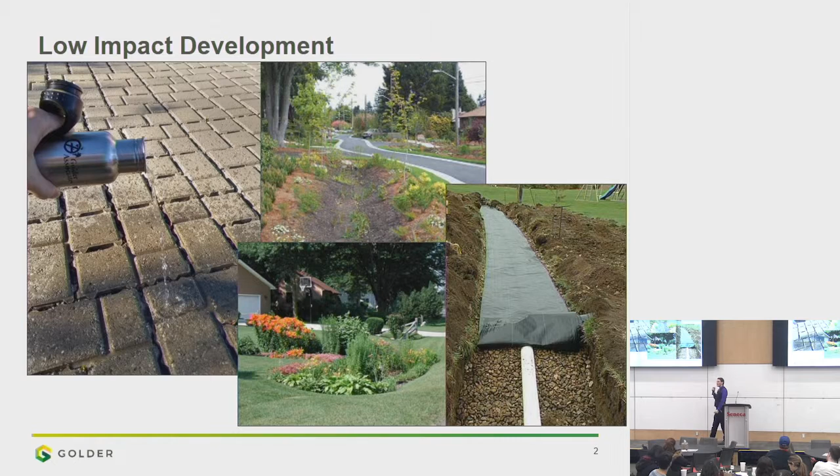So despite the fact that there's been a rising tide of adoption in the United States, which is way ahead of us in terms of this, and mountains of data about how this stuff is working out, we haven't really seen that adoption in Ontario, again, until quite recently. And the problem is, unfortunately, engineers. And I do count myself in this group. I am very much part of the problem. Because engineers are creatures of habit.

Since we deal with really complex systems that are the intersection of things like climate, rainfall, runoff, and downstream receivers, we tend not to trust those physical formulas. We tend to go for curves that are fit basically to experimental data, stuff that's been measured. Best example of this, this guy here down in the gray, is called Manning's formula. This is the biggest formula in stormwater management. It's what holds it all together.

This formula is the governing formula for everything that I do. It's actually not a physical formula. It was developed as a best fit curve by an accountant over 100 years ago during the Irish potato famine. But it works, and that's why we still use it. And that's the kind of attitude engineers have.

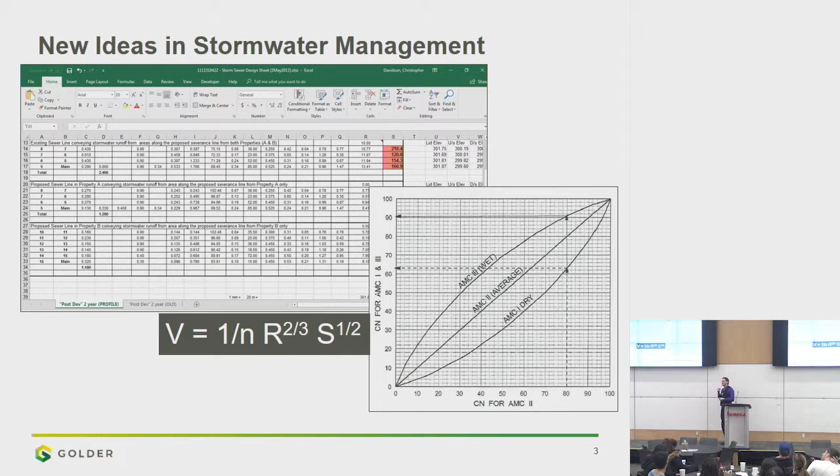We all have our own Excel spreadsheets for calculating things like pond depth or pond size or stormwater capacity. And it's ridiculous, but I mean, that's what we have. It works, so we hang on to it, even when better modeling comes along. So changing that kind of attitude, introducing low impact development to that kind of people, it takes a lot of salesmanship. And to their credit, regulators like conservation authorities and cities have done a lot of work getting the word out there about the benefits of low impact development for developers and for cities.

So people like David have been talking at conferences for a long time. People like Jen Hill, who you'll hear from later on, have done a lot of work with the Sustainable Technologies Evaluation Program and the Toronto TRCA. There's also been a lot of regulation changes that have encouraged low impact development.

Despite these really great endeavors, there's still a lot of headwind to actually bringing up LID and making it something you see a lot in Ontario. Actually, just a quick question. So you guys haven't seen LID as far as design before. Has anybody actually ever seen elements of low impact development in Toronto? Like permeable pavement, we've got a couple there, okay. So things like a bioretention system, things like a rain garden, they're not that common.

So the problem, again, as I said, is engineers. And engineers are busy people. You can only really get in front of them so often in terms of doing workshops, doing conferences. So how do you kind of convince them of the benefits of low impact development? A couple of years ago, some conservation authorities got together and came up with an innovative solution. They were going to make a software tool.

So a software tool as a way of communicating a new idea, especially a new concept or breaking a habit, has some great things going for it. For one, a software tool gives you a lot more face time with your audience. So when you're talking at a conference or a workshop, that's a single structured event. You give them a software tool, they can bring that home, they can use it again and again, and they can keep trying it out on their own.

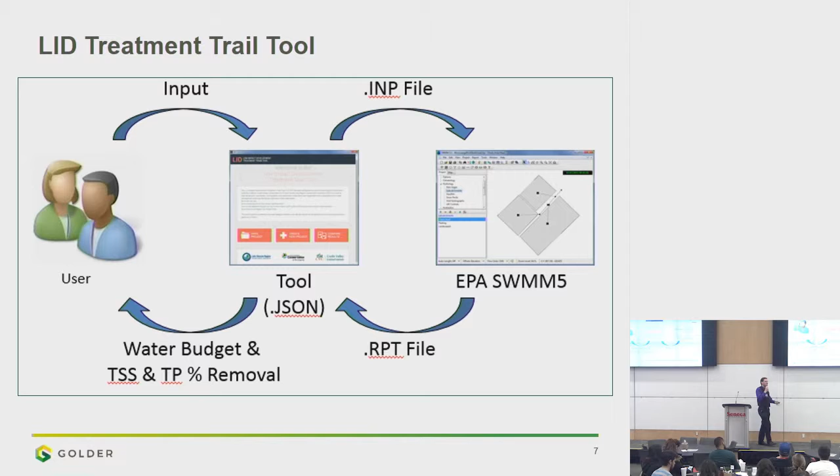So the way our tool works, the user designs their thing in the interface. The tool then creates the input file for SWMM. SWMM 5 runs in the background, produces a report file. Our tool is going to mine that report file to get some of the information out of it, and answer those key questions that the conservation authorities are looking for. So again, things like water budget and removal of certain parameters.

And the idea is all this happens in the conceptual design phase. So when you think of development, you have an early development, just looking at a blank site. You have a conceptual design phase when you're working out where the houses are going to go, where the commercial areas are going to go. And then later on, once you've actually gotten to drawing the lots, drawing the sewers, drawing the roads, then you do your detailed design and you're done. So this is at that early stage.

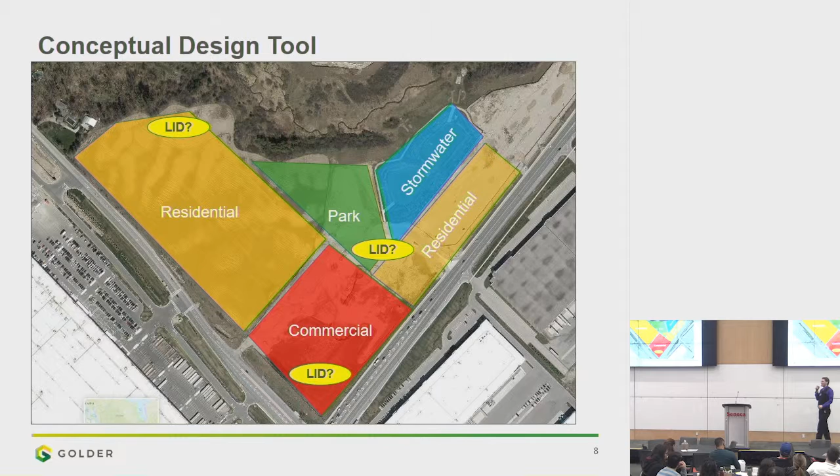And the idea is that right when the developer is sitting down with the regulators or maybe with the public at a design charrette, they're getting to figure out where they're going to put some LIDs and how this is going to work and what kind of targets they're looking for. So again, this model is being designed as a way for plenty of people to use at that early design stage and open for everybody to use.

So I'm going to give you a really quick run through the user experience from the model. Again, this is a model for everyone. We're not making this specifically for engineers, but people who want to experiment with different LIDs and get a good idea of what's happening with stormwater management.

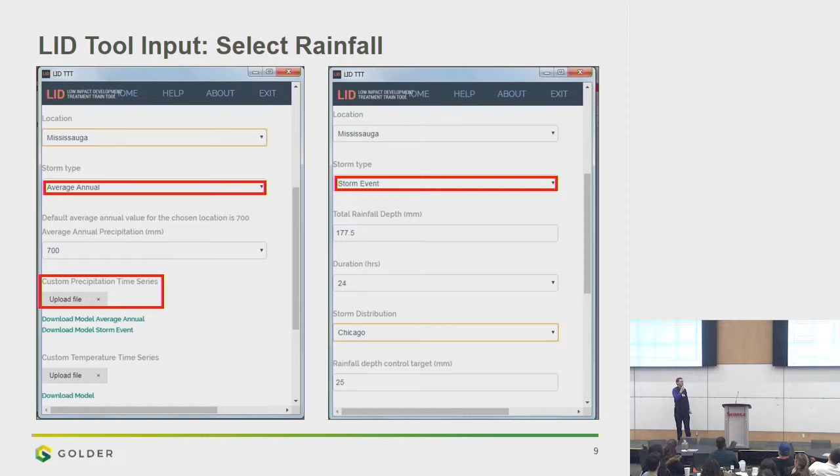So when you first select your site, you just select a location and whether or not you want to run an annual average storm event or a specific one storm event. You select your location, and based on that, the tool is going to recommend some average annual precipitation, or you can go ahead and enter your own numbers. Conversely, if you want to do a storm event, so if you're looking for the 100-year storm or a 25-millimeter storm, you go ahead and enter that. You enter in the distributions for your rainfall and run the tool.

When you actually get to running the tool, you get to draw your catchments and draw your LIDs within the tool. The models are done in a GIS environment, so you get all the areas measured for you. The tool is going to pre-enter some of that data for you based on the area you've drawn. You can draw on a base map, you can draw on an aerial photo, you can draw on GIS and CAD files you've imported from some other source.

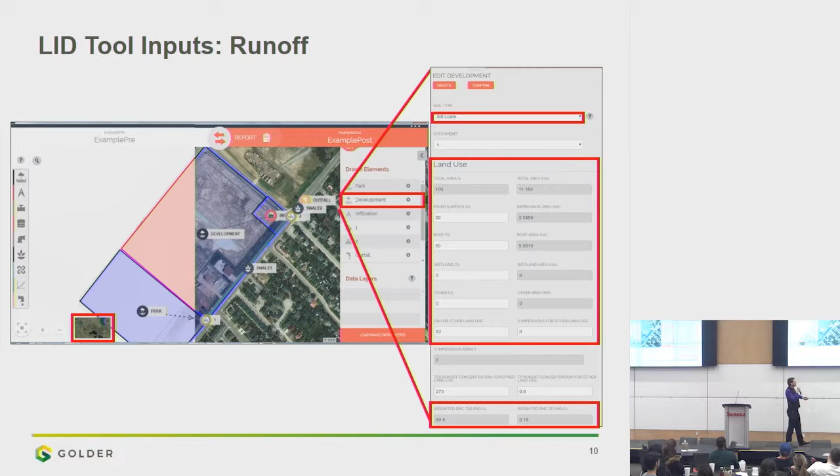And all the user has to do is enter in basically stormwater or soil information and some basic information about land use. And the tool is going to pre-fill some of those values in there. So again, all the default values are in the tool, but you can go ahead and override those. So things like curve number for runoff, things like runoff concentrations, you can go ahead and override those if you have a reason to.

As far as LIDs, we've got a whole bunch of LIDs in the tool, so you guys hopefully will be seeing more of these in your next couple of years of study. Different LIDs include things like surface LIDs, so rain gardens, where basically you just have a low point in the ground that's designed to infiltrate water, or something like a permeable pavement. Infiltration LIDs, so things like infiltration galleries, things like bioretention facilities, you can add those in there.

Things like oil grit separators, so that's when you have a manhole, you have a lot of flow coming in, the manhole is going to remove some of that sediment for you because of just the way the manhole is set up, or even traditional stormwater management facilities at the end of pipe.

So all those are in there. We've got default removal percentages for those to provide what kind of environmental benefit it's going to do. But more importantly, you can override those because we understand that one size does not fit all when it comes to LIDs. It really depends on the design of them. And you guys will be doing the design of some of these LIDs. Fortunately, the tool has some helpful hints in there to help you design those LIDs.

So for instance, if you've run too much area to your LID, it's going to flag that for you. If it's going to take a long time for your LID to drain down. So for instance, if you build a big storage system in the ground and the soil is really tight, it's going to basically take a long time to drain out, and the tool is going to flag that for you. So once you've done all that design, you've got your site laid out, you go ahead, you run the model, it does the SWMM 5 stuff, looks at the post-processing, and gets those results.

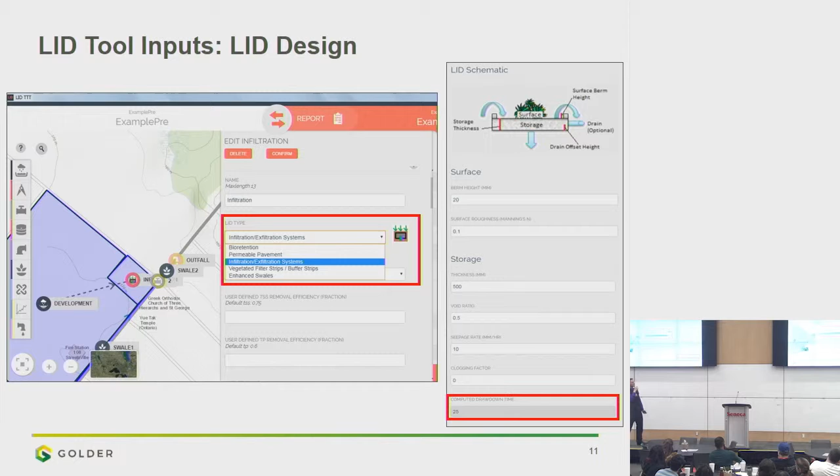So this is the first result, and this is, again, if you're running a storm event, the tool is going to give you an idea of volume control. And runoff volume control is wording that was coming from the Ministry of the Environment, now the Ministry of Environment, Conservation and Parks, thank you, yes. And we're still looking for that manual. It'll maybe come out someday. But we're looking basically at site control.

So this is my question for David. When you think of storms, in Ontario, we're asking you to basically control, it doesn't sound like much. It's like 2.5 centimeters is the design storm, 25 millimeters. Turns out to be a lot of water once you actually get to a fairly impervious site downtown. And we're asking you to control that on site usually. And this tool is supposed to help you do that. It's supposed to help you control the site, control that runoff, and treat some of it. So it's giving you the breakdown of what you're going to have to treat versus what you're going to have to store and comparing to those targets.

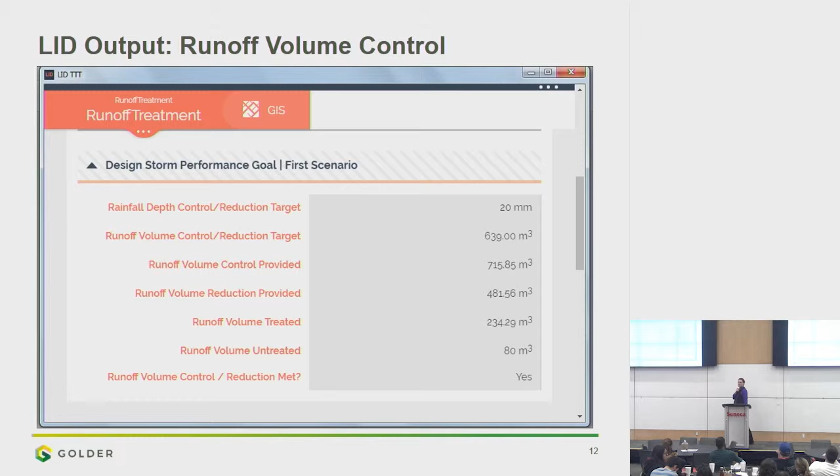Tool also gives you, in terms of results, water balances. So here I've actually run 2 scenarios. I've got an existing scenario and a proposed scenario. And almost every case I've worked on for the past 10 years for development, the Conservation Authority or the city has asked us to look at the water budget and match pre-existing infiltration to post-development infiltration. And you got to think that's pretty tough if you're paving over half your site. How are you going to get water back into the ground?

But the thing is, there are a lot of users of water out there. We don't think about it much in Toronto, but there's lots of people who have wells. There's lots of people who need groundwater resources, and there's lots of natural environments that do rely on that groundwater discharge. So keeping that up is critically important. In this case, you can see we've built a site where we've increased the imperviousness. There's a lot less evaporation. But the site infiltration has gone up because we've added some LID resources to get more water back into the ground to satisfy that requirement.

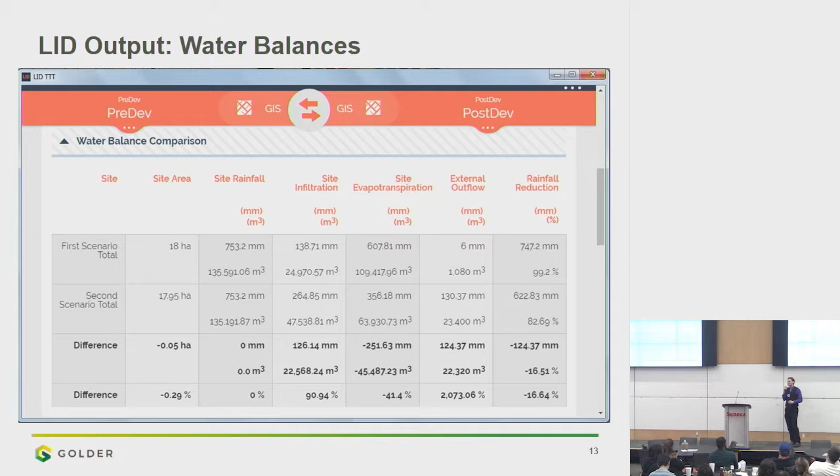And lastly, the tool is going to give you some loading input. So this is actually a specific request from the Lake Simcoe Region Conservation Authority. Anybody know where Lake Simcoe is? Show of hands. Okay, this is the best result I've got so far today with the hands up thing.

So it's north of Toronto, and it's got a lot of land use around it as far as cities, got a lot of farms around it. So they have a problem with phosphorus in Lake Simcoe. Phosphorus is pretty high. So recently, Lake Simcoe Region put in something called the phosphorus offsetting program. So developers are now charged an amount at development based on how much phosphorus is discharged.

And you see this one here, if you look at the left column here, 11.75 kilograms. Doesn't look like a lot. That's an annual loading for phosphorus. That 11.75 kilograms might cost the developer hundreds of thousands of dollars in development charges because they are really interested in how much phosphorus is going into that system, and the Conservation Authority is very strict about that.

The way to bring that down, as we've done in this case here, is to start looking at low impact development, start looking at ways to treat that phosphorus to reduce the eutrophication of the Lake Simcoe region. And it's not a Lake Simcoe problem only. There are other places that are having the same phosphorus issues. But low impact development can bring that number down. And since you're saving the developer $100,000, they are very interested in seeing that number come down.

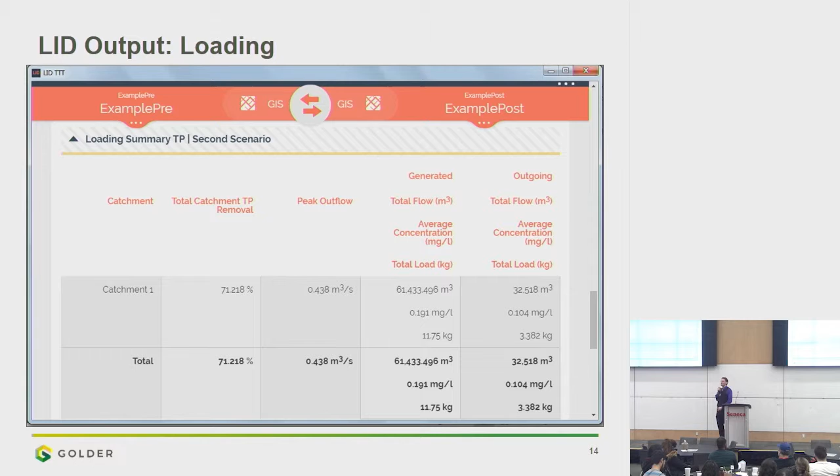So they want you to play around with different ways of treating it, different ways of reducing that phosphorus. And that's what the tool does. The tool is really designed to give you a quick way to evaluate different options. So you lay out your site, you try some different options for low impact development, try some different ways of treating things with traditional stormwater management, with infiltration system, the bioretention system, and seeing if you can get those numbers down to what people are looking for.

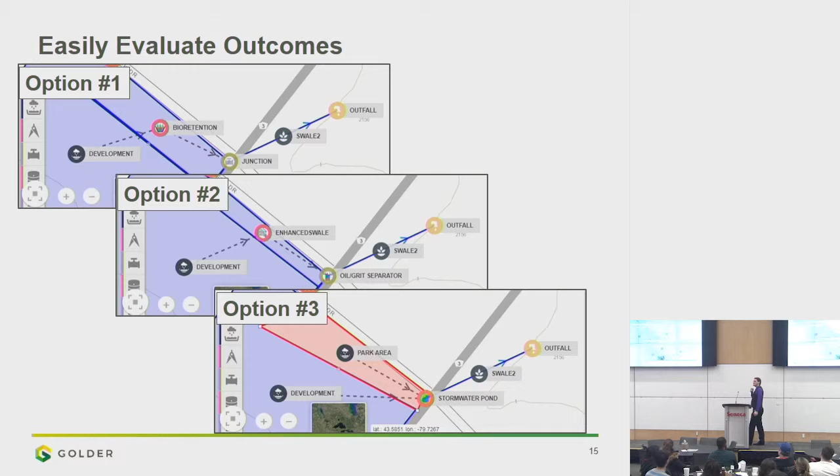And just playing around with that and getting the immediate feedback. That's really the goal of the tool, at that conceptual design phase, to get the immediate feedback on how your system might work. Then you go ahead and you proceed with detailed design based on that. So that's really where we're at. The tool is available now for download from either the STEP website or the Conservation Authorities.

I'd really like it if you guys could try downloading this. I love to hear feedback, even if it's to tell me that the tool sucks or it has a problem or it's got a bug somewhere. We've had about 1,000 downloads so far since we released it last year. Some from outside Ontario, actually even some from outside Canada, which I found pretty interesting.

Yeah, and so the conservation authorities have done a lot of workshops on this. They've gotten in front of people and run people through the tool basically to tell you this is how the tool is going to work. This is some example projects you can work through. And I've actually had clients come back to me. Clients have asked me, can you use this tool for my site? So it's nice it's become full circle. Now I'm seeing it from a different side. I'm having people asking me about this tool. And I'm excited about it.

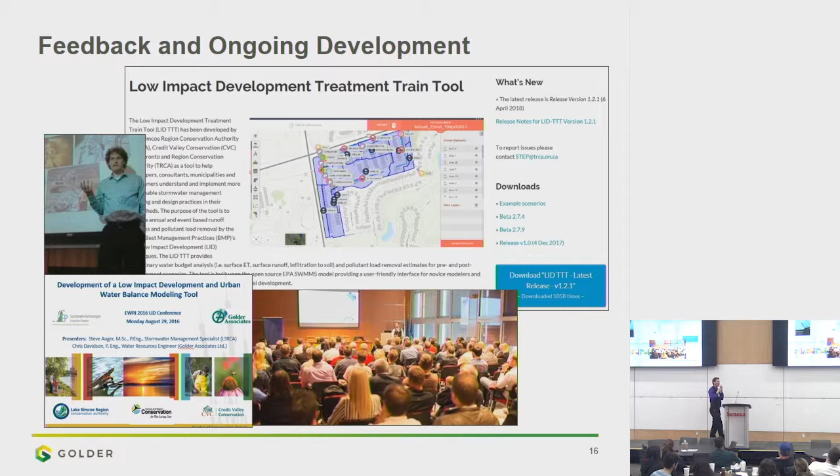And more than that, the development team you saw before, they've actually had a lot of positive reviews from that. We're actually now at the point of doing a version 2 of this tool. So we've actually been hired again by the conservation authorities to go back and add some features to the tool. So deal with some of the feedback we've got, add some of the features we talked about before. And this is why it's good if you guys could kindly download this tool and give me some feedback, because we are trying to get some new things in the tool to help us out.

So that's really it. I mean, the LID tool, based on what we've heard, has had a good impact. It's helped people add more low impact development design to their sites. It's helped educate engineers and scientists about how to design low impact development. It's helped encourage them to increase the amount of development on their site. The tool itself, as a means of communication, that's important too, seems to have a pretty positive impact. The idea that we're getting in front of people time and again, that we're seeing them over and over, we're getting their message across, and we're seeing more people pick up low impact development based on that.

And so all of this, the LIDs, the software tool, the communication, I'm hoping this kind of resonates with you guys, and that this is something you guys can use in turn in your career. And I hope to be in the audience someday soon when your next nice idea becomes a reality.